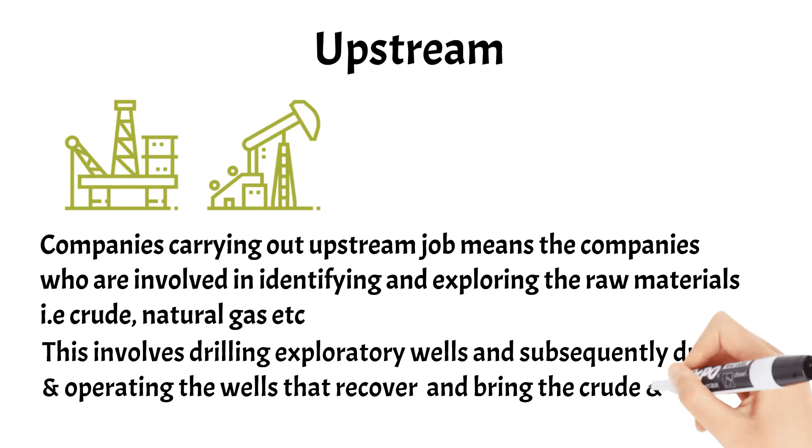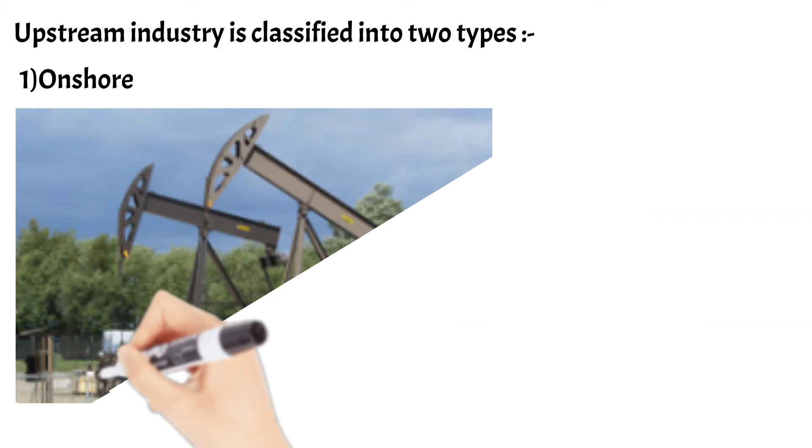We already have seen what is an upstream industry. Just to brief, it is an industry which involves identifying and exploring the raw materials, which in this case is the crude and natural gas. The upstream industry is basically classified into onshore and offshore. Let us understand each of this in brief. We will have a comparison between the onshore and offshore so that it will be clearer.

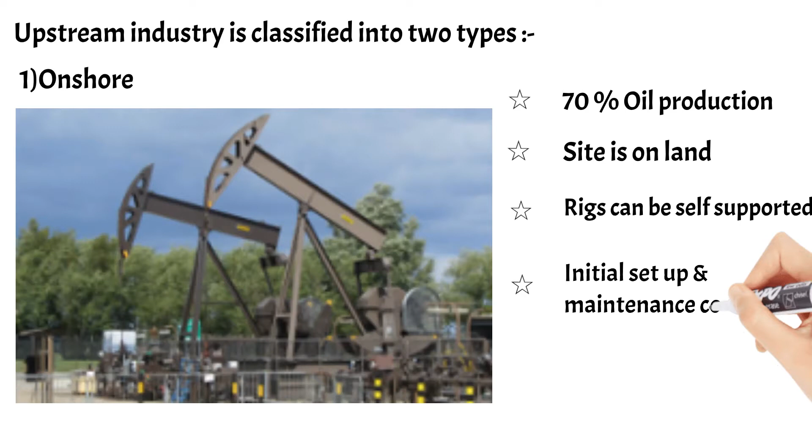70% of the world's oil is produced onshore. The name itself clarifies that it is on land. The rigs are supported on the ground, which makes it easier to set up. Initial setup cost and maintenance cost is less as compared to offshore.

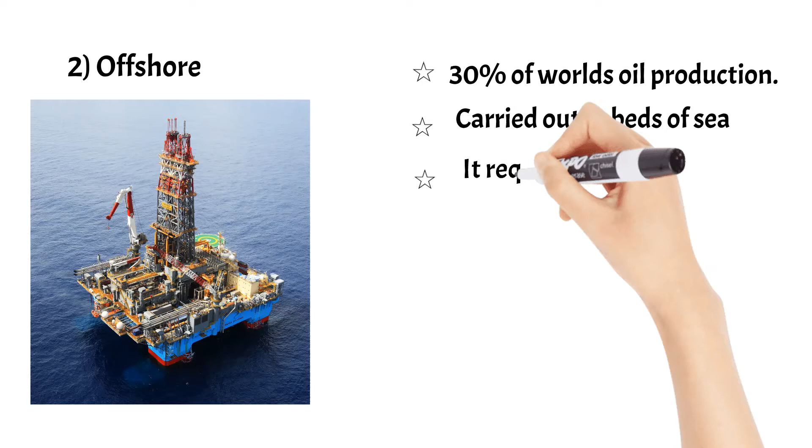Let's move towards offshore. Offshore industry contributes to 30% of the oil produced. This is carried out in the beds of sea. It needs anchoring of the platforms to the seabed, which is the more tedious and challenging part of this job. Initial setup cost and maintenance cost is high as compared to onshore.

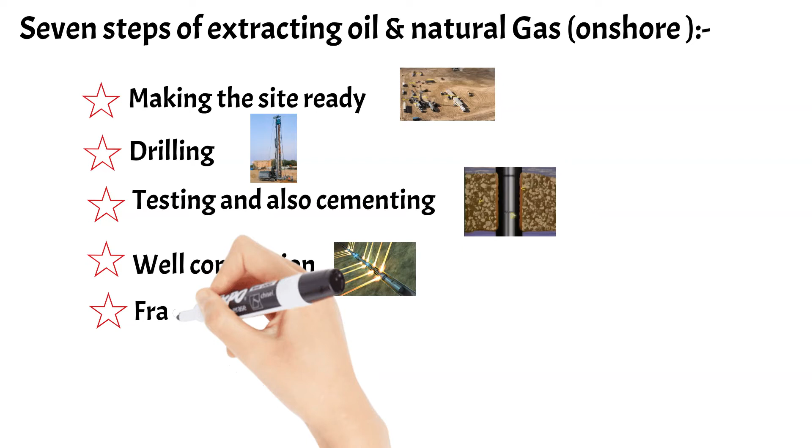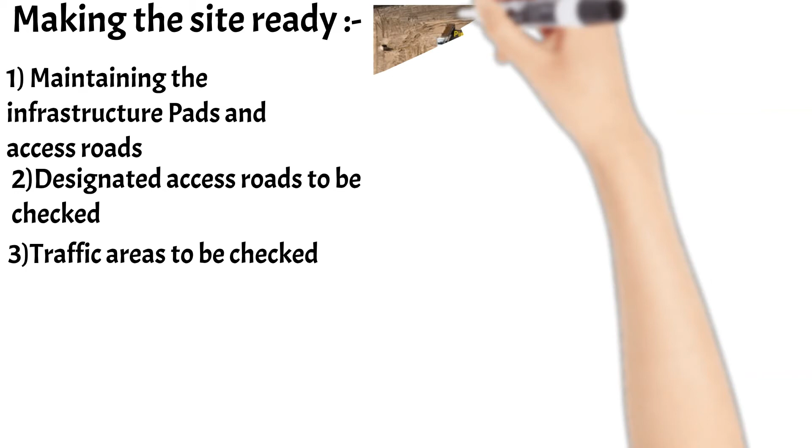So in this video, we will see various steps onshore to bring crude to the surface: making the site ready, drilling, testing and cementing, well completion, fracking, production and fracking fluid recycling, restoration of land and finishing. We see that pads and access roads are built, taking care that the traffic is diverted, noise barriers are in position to the access roads, and safety throughout the site is taken care of as per the local laws.

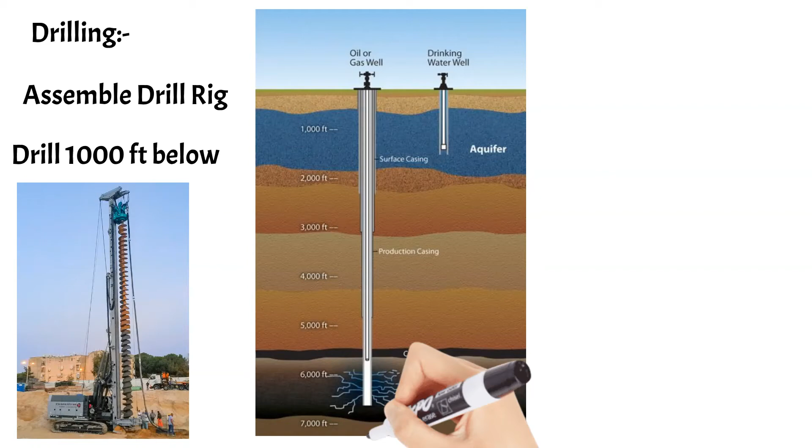The drill rigs are brought and put together, maybe 20 to 30 truckloads. A well is drilled beneath the pad, maybe around 1000 feet near the aquifer. A steel casing is cemented so that there is no polluting of the aquifers. After that, the hole is drilled further till it reaches a depth of might be around 6000 feet, which is 10 times the height of Statue of Unity.

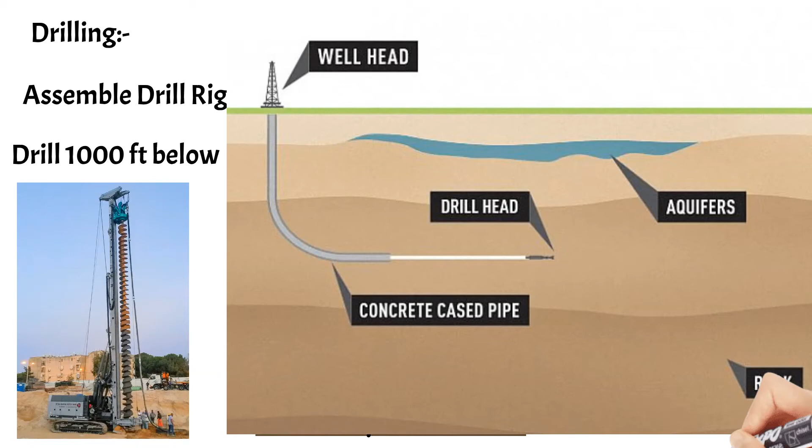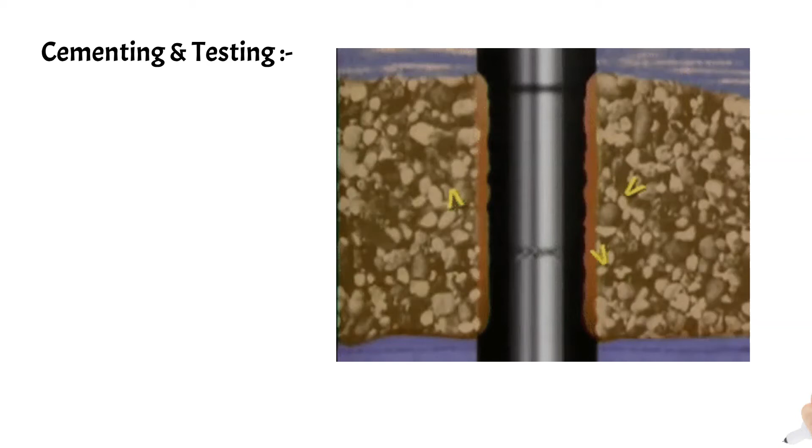Then it is horizontally drilled till another mile or two. This horizontal drilling helps to use only one drill pad for a number of oil wells instead of multiple pads having a single oil well. Once the target distance is reached, the drill pipe is removed and steel pipe is pushed to the bottom. Various tests are performed to check whether the pipe is impermeable before the production of oil and natural gas.

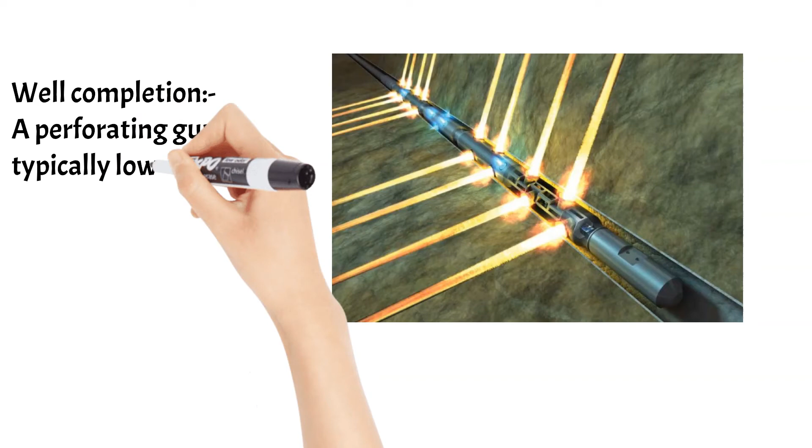After that, a perforating gun is typically lowered into the ground and fired into the rock layer. This creates holes and connects the rock holding the natural gas and oil to the wellhead. The next step is fracking. This is a very important step. Fracking fluid is 95% sand and water and the balance 5% chemicals.

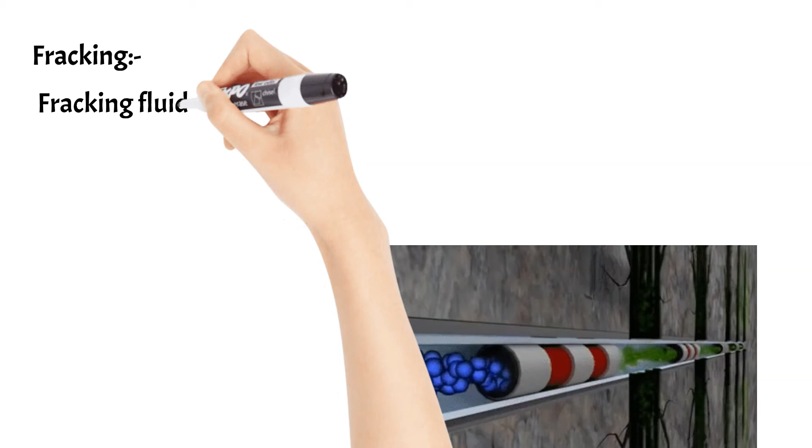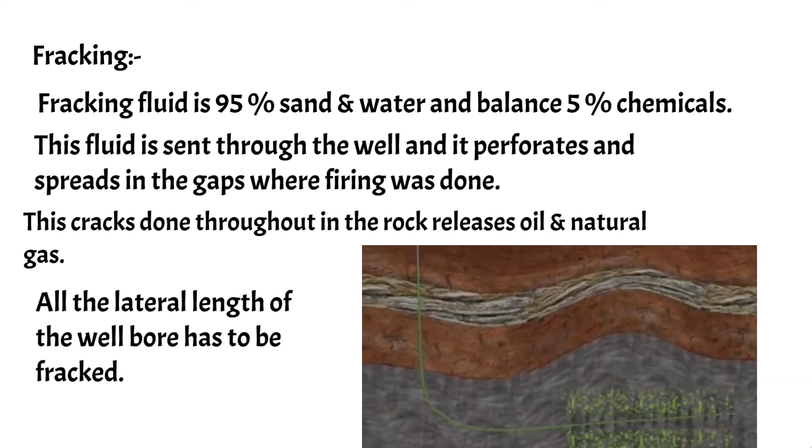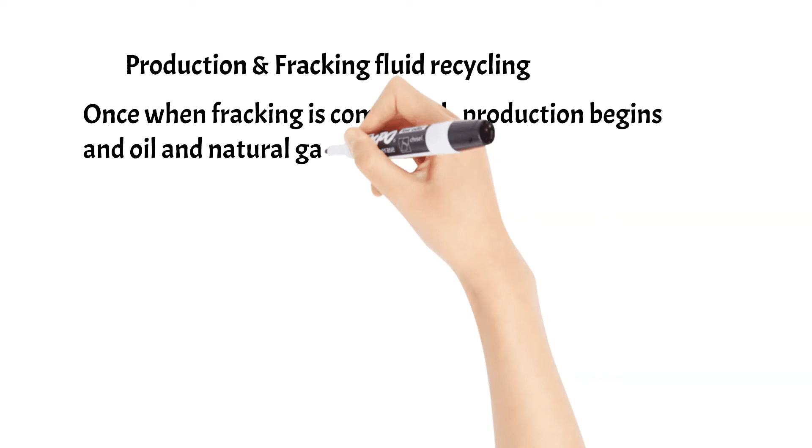This fluid is sent through the well and it perforates and spreads in the gaps where firing is done. It starts freeing the oil and natural gas. All the lateral length has to be fracked and this cycle has to be repeated many times. Once fracking is completed, production begins and oil and natural gas is removed. Also, fracking fluid is recovered which can be recycled and reused again.

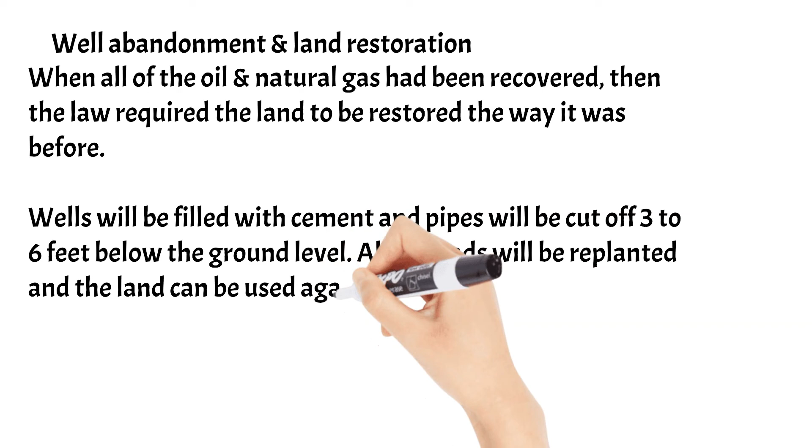So, after the reserves are fully utilized, it's time to make the area as it was before. Wells will be filled with cement and pipes will be cut off 3 to 6 feet below the ground level. All the pads will be replanted and the land can be used again the way it was before. No one can guess that there was an oil well there once upon a time.